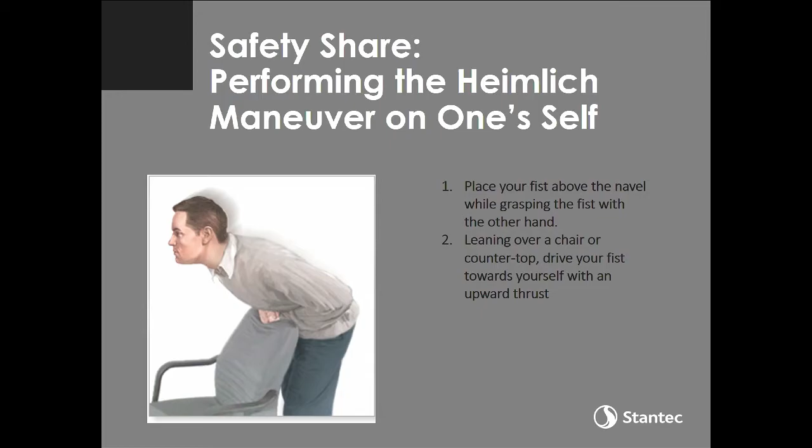This is my co-chair, looking very formal, and I want to thank him because he did a lot to make this session one with a lot of rock stars in it. So I'm kind of excited to get started.

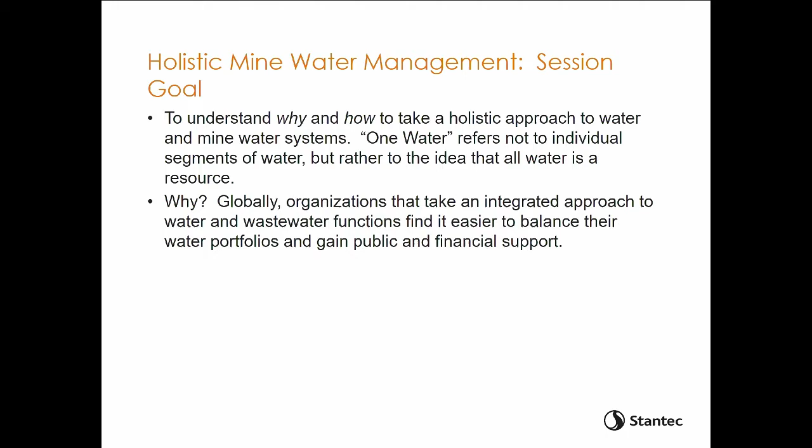The goal of the session is to understand why and how to take a holistic approach to water and mine water systems. And the reason for that is just because globally, organizations understand that this is a competitive advantage if you take this integrated approach. And it helps you gain financial and public support for your projects.

Our next speaker is Marcelo Reginato. He is a water resources senior engineer with Jacobs. He brings 20 years of experience in systems models, watershed modeling, hydrology, hydraulics, and water resources, besides being the technical lead in the development of several water balance models in the mining industry. He has been a key technical resource on many high-profile conservation, groundwater recharge, and restoration projects.

His principal technical expertise is in systems models and water resources. He has an MS in civil engineering from the University of Nevada, Las Vegas, and a BS in civil engineering from Universidade Estadual de Campinas, Brazil.

So let's start with the phases of a mine. What are the typical questions that a manager might have during the different phases of a mine? So we have the development phase, we have the production phase, and the reclamation phase. And during all these phases, the water balance tool can be really helpful.

So I have a couple bullets as examples for each one of the phases, how the water balance model could help you. So for the development phase, you might want to try to understand how reliable your water source is. You're probably going to need some water in your mine, so you want to understand how reliable it is and where the water is coming from to your site. You might need to do some stream diversion. So the model might help you size that diversion that you need at the site. Then you go to the production phase of a mine.

A model could be used there dealing with the production of the mine. You might start with one idea of what your production will be, but then what happens if you change your production schedule? Do you need more water? Where are you going to bring that water from? How much water are you going to import?

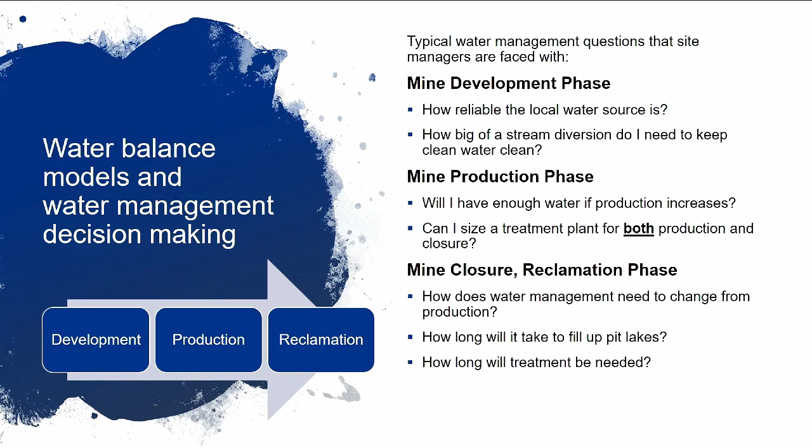Specifically for reclamation, since my case study will be focused on that, I wanted to give a bit more detail. What are the typical activities in a reclamation phase of a mine? First, you want to understand the sources of water contamination at your site. You want to avoid hot spots and keep your clean water clean. You might want to do some stream diversions, rerouting things at your site. You might put in waste rock covers, so you understand the effect of the covers downstream on flows and water quality. You might have passive or active water treatments, so you see how that works with the entire site. And you'll probably have a pit lake where you need to manage the water level. So those are some example activities in reclamation.

The water balance provides a lot of value when you try to evaluate multiple reclamation options. You run the model with what-if cases: what if I have this project, what will be the impacts downstream on flows and water quality? The water balance can also provide insights on the most efficient alternatives, where you're going to get the most bang for your buck, where you want to actually design and implement projects.

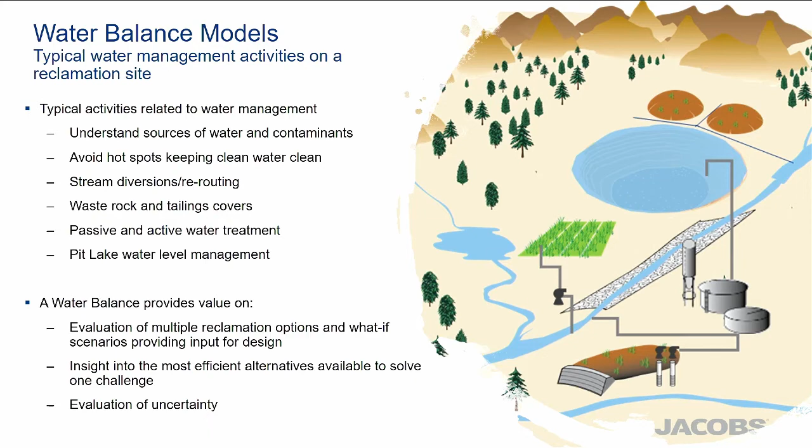And it can also help evaluate the uncertainty that you have at your site. That uncertainty could come from water quality concentrations you might be seeing at your site, or from the uncertainty related to the activities you're planning to implement there.

So a little bit about the water balance components. First you need to define the boundary of what you're going to model. Here we delineate the model domain, what you're going to include. Once you define that, you want to understand the inputs to your model, where the inflows are coming from. In this cartoon example, you might have some in-stream flow here, another stream flow there, some precipitation, maybe some groundwater. You might also have loads coming in, so you want to keep track of the water quality and loads coming into your system.

So you've got the inflows. You also want to understand the outflows from your system. In this case, we have the outflow coming right here. You might also have some groundwater outflow, and of course evaporation. So once you define the boundary and know the inflows and outflows, you need to keep track of the changes in storage within your boundary. That's in a nutshell what we do in water balance tools.

We have different components: a pit lake, waste rock dumps, rerouting of streams, treatment plants. The water balance tool connects all these elements under one umbrella, under one tool, and then you see how one affects the other.

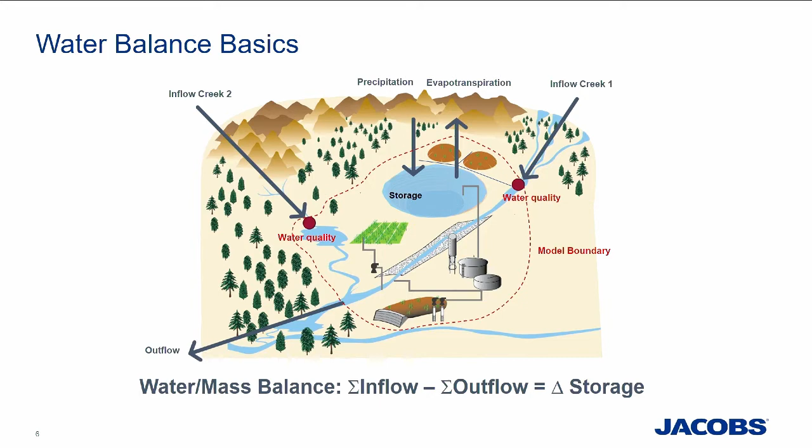So let's talk a little bit about the development, how we develop these water balance tools. Going from the site, we define a conceptual site model, how we think the water moves through the system, and then the model. Our approach generally is top-down, starting from simple assumptions to complex.

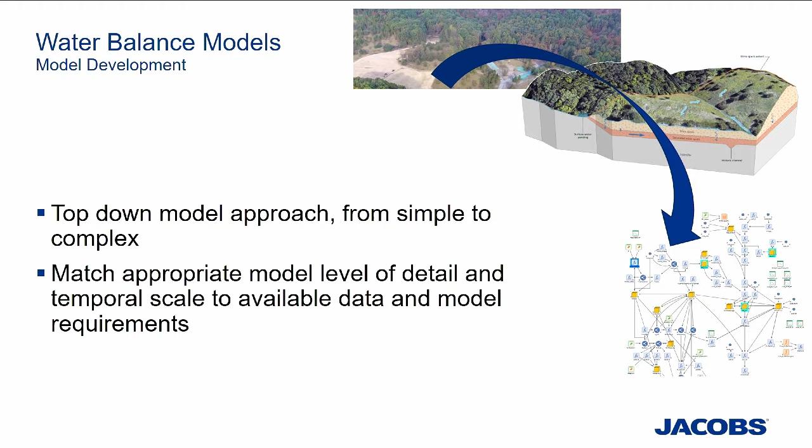That's dependent on the data we have and the questions we want to answer. The challenge in developing these models is to match the appropriate level of detail with the data we have and the model requirements. That's the key thing: look at what information, what data, what you understand about your site, and then build the model that matches that.

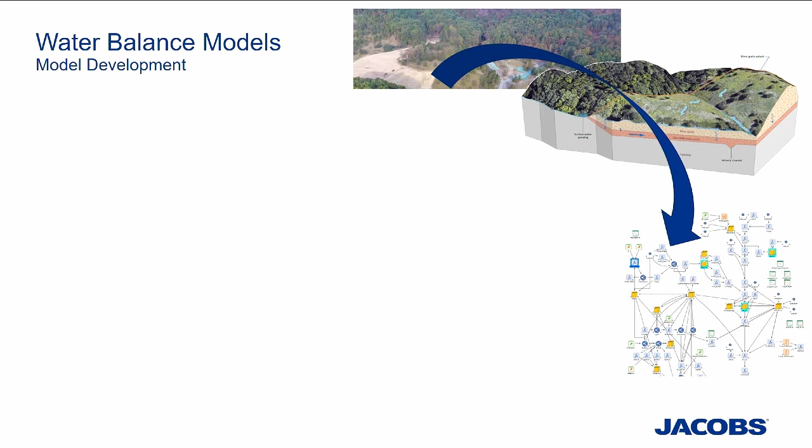There are two main cycles when we develop a model like this. We start with the conceptual model, see what available data is out there, try to fill data gaps, collect more data, and reach a better understanding of the site. We can keep doing this, collecting more data and improving the site understanding.

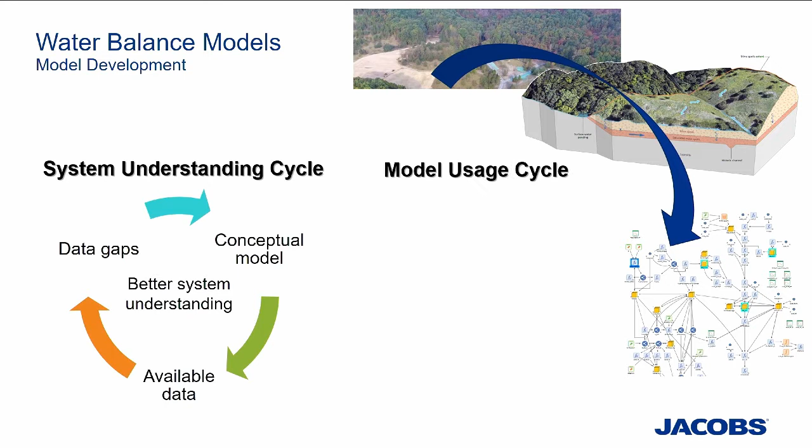Then there's a model usage cycle. Once we're ready with the conceptual model and have an idea how the system works, we can start developing the model, create scenarios, check model results, and hopefully answer the questions. There might be more questions after we run this first cycle, but every time we run it, we improve the model capabilities a little more.

Also, the insights we get from this cycle might improve our conceptual model. And then we might have to request more data, see if we have more data, and run through the cycle again.

So this could be a week's effort—it might be a very simple system where we have the data, we're not going to collect more, so we know exactly what we're going to do, and we develop the model in a week or two weeks. Or it could take many years, depending on how many questions we want to answer and how much data we want to acquire.

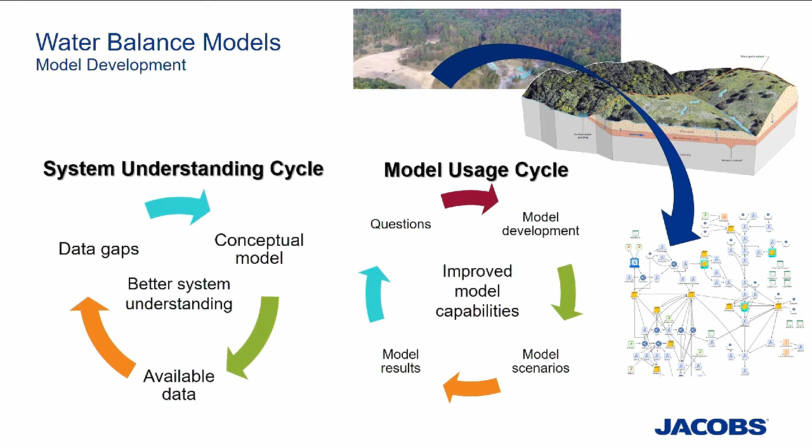So with that, I'm going to start the second part of the presentation, where I'll talk about a case study. This is a historic mine, and operations ceased in 1986. Some reclamation was done back in 2000, but most of the reclamation activities happened after 2014. My case studies will be: one, waste rock cover implementation; second, stream diversion; and third, lake stratification.

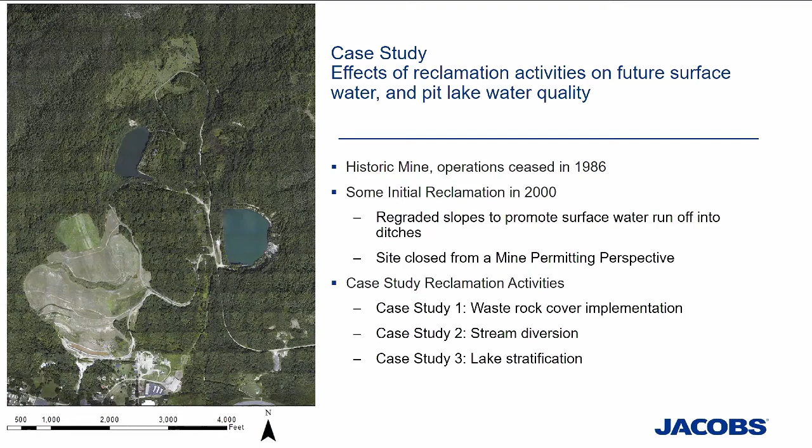Here's the site. The drainage here is from north to south. There are two watersheds, some waste rock piles, and two main pit lakes. A little bit more about the site: here you can see the watersheds in color, green and yellow, the two main watersheds we have, and approximately the drainage with the acreage, just to give you an idea of the size of the project.

We have about 55 inches per year of precipitation at the site, so it's not a dry area—a good amount of rain. The drainage coming from north and from pond 2 goes into pond 1, and out of pond 1 we discharge into the main stream. The flow here is about 850 gallons per minute per year on average for this watershed, and 150 GPM for the smaller watershed. So precipitation is the main input to our model.

When we started developing this tool around 2014, 2015, we had some historical precipitation data—that's what this chart is showing, historical monthly precipitation. But after that, we didn't know how much precipitation we'd get going forward, so that's why you're seeing this chart. Sometimes we might have a very dry month or a very wet month, based on historical precipitation.

We had about 50 years of precipitation records, and we used that in the model trying to understand our uncertainty related to the hydrology. So the first case study will be at that watershed, waste rock covers. The second case study is stream diversion in the north area, and I'm going to talk about stratification in case study 3.

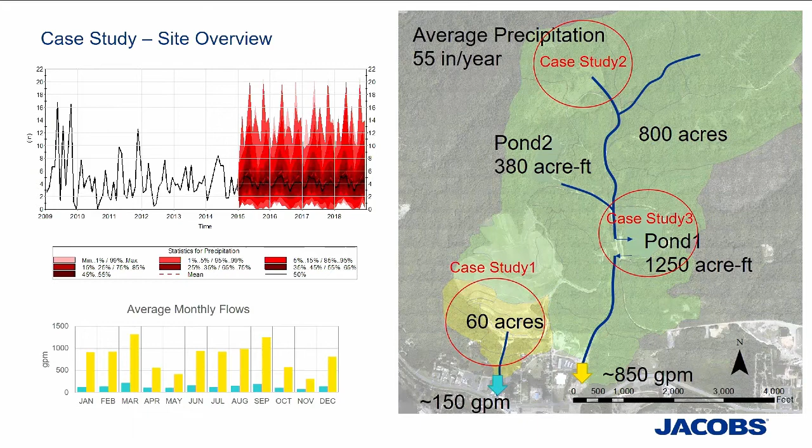So first, waste rock cover implementation. On that area, what's happening here is we have the watersheds. The water infiltrates, hits the contact, the spoils, and we have some flow and water quality downstream here. So the idea was to put covers there to avoid clean water from precipitation reaching the spoils.

And improve the water quality of seepages that were daylighting down here. So with the covers done, we collect the clean runoff, and that will help the dilution with the seepage we're seeing here. So the question for the model was, if we put those covers, what will be the impact on the seepage down here and the water quality? The challenge was to make a model flexible enough to accept inputs so we can change the size of these covers and change assumptions and see what would happen downstream.

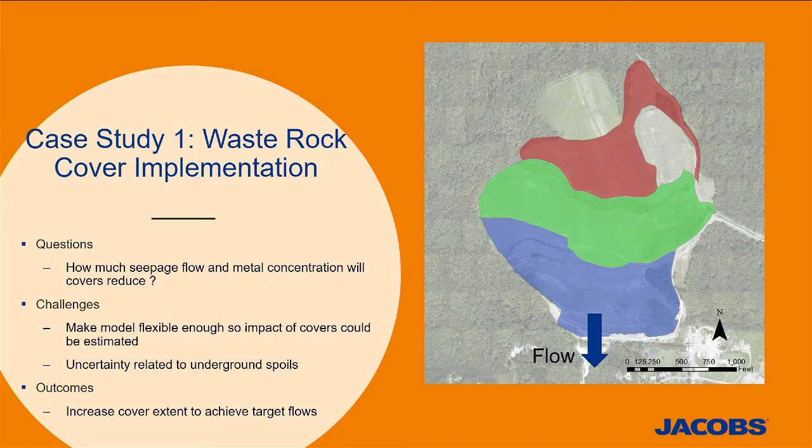The outcomes of the model: we ran a series of scenarios where we changed the size of the covers based on what we're seeing from the model.

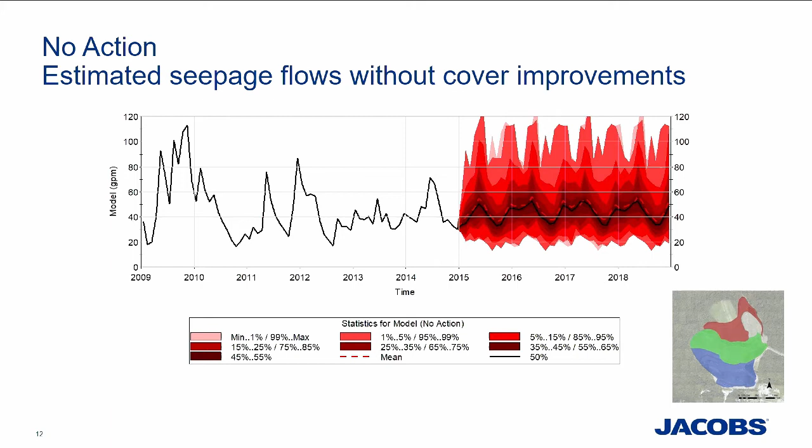So here are some other results. This is the estimated seepage at the bottom of the hill outflow without the cover improvements. This is what we are expecting in flows from the site from 2015 going forward, that's the range of flows depending on precipitation. So we ran this scenario without the covers, and then we put the covers into the model to see the impacts they would have on the flows.

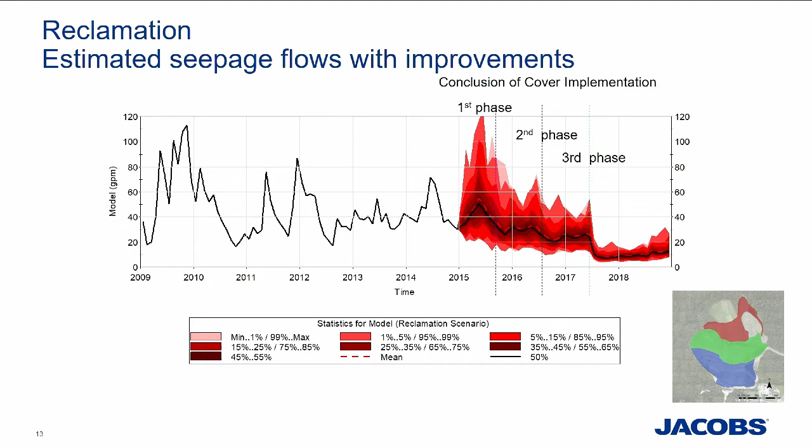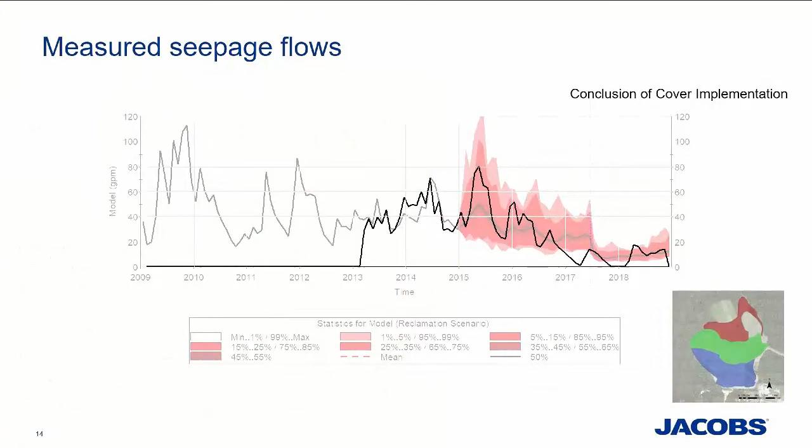So we go to the second case study: stream diversion, up north. The challenge here was we had some waste rock located at this part of the watershed. So this is the watershed, with some waste rock.

We had some clean water from this blue zone going through the waste rocks, and the water quality downstream was poor. So the idea here: if we implement collection, if we divert the stream, put concrete channels here to keep the clean water clean downstream and help dilute some seepage, what would the model tell us? What would be the benefits of doing such a project?

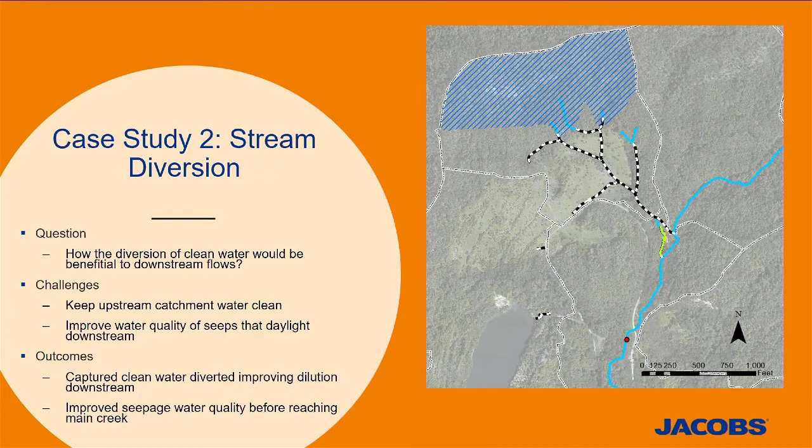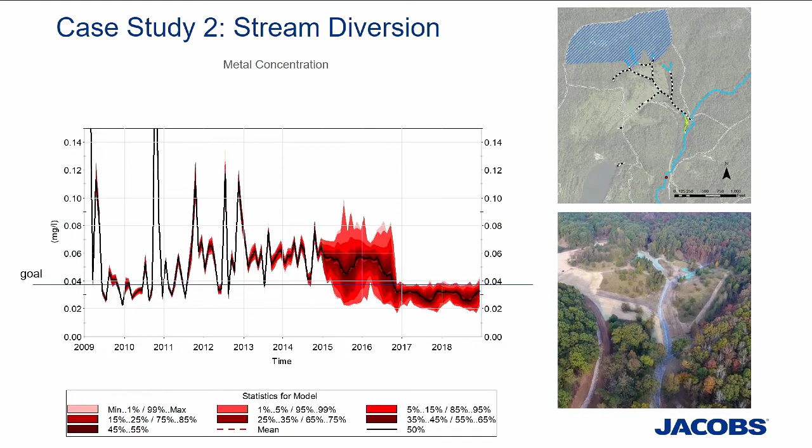So here, similar to the previous case study, but now I'm showing metal concentrations. We had a target goal for concentrations downstream. Here, by the way, are the measured concentrations at the red location. You can see the concentrations for the metal really dropped after the project was concluded. At the conclusion of the project, concentrations dropped from around 0.06 to between 0.02 and 0.04. This was our goal.

Same idea with the precipitation uncertainty, we tried to cover that. The blue dots here are the measured concentrations. I added a moving average line just to help see the difference between the model and the observed data. The gray line here is a no-action scenario, showing what would happen if we didn't have these stream diversions. With the precipitation we saw at the site, we would see higher concentrations.

So then we go to case study 3: lake stratification. The question here was, with all the benefits we did upstream, plus some reclamation activities we had at the watersheds, what will be the water quality discharge from the pit lake?

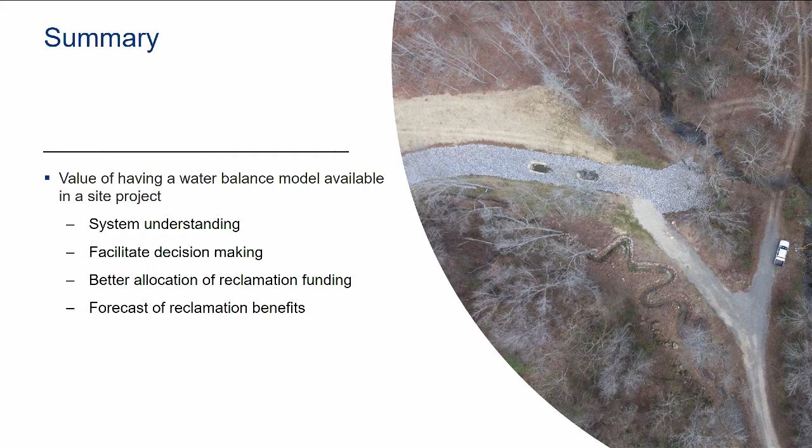That's all I had to present today. With that, I'll see if I have any questions.

We don't have time for questions. Oh, we don't have? Oh.

Do you have one? Is it quick? Can it be quick? Yeah.

No, no. There was a question if we need a groundwater model to do that, right? But we found good correlation with the assumptions we had, so we didn't need that. But oftentimes, you're right, sometimes on the cycles you find that, okay, I need a more detailed model, and then you go and create a more detailed model.

If you had any more questions, I'll be around, so please contact me. Thank you, Marcelo.

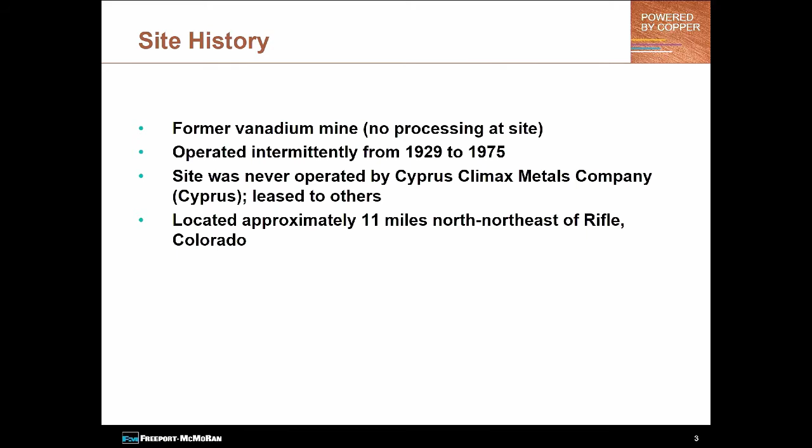Some of the features at the site: there were 6 mine openings, 5 adits, and 1 suspected collapsed shaft. 2 of the adits discharge. You can see the discharge is not very much, 1 gallon and 2.5 gallons. There were 2 waste rock piles, but the main waste rock pile was 17,600 cubic yards, so a very, very small site. And the site had debris all over the place.

The kids had even dragged a couch up into one of the adits. It was pretty interesting, so we could tell that there had been a lot of trespass or recreational use of this site. There was also an unimproved road on the site that the Forest Service actually used a few years ago for fighting a fire.

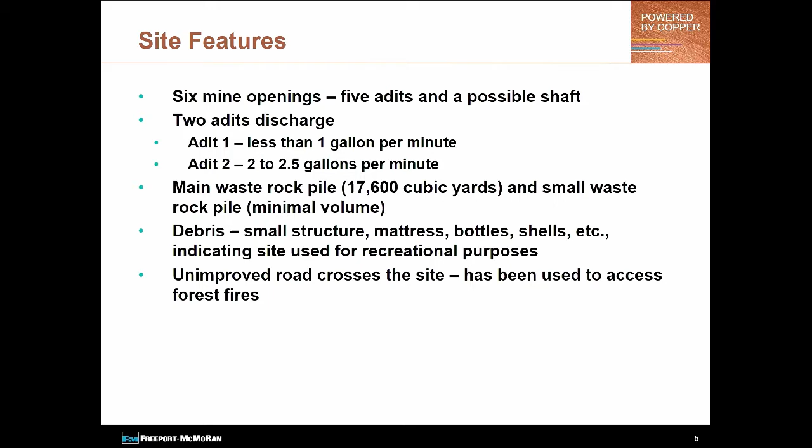We entered this site into the Voluntary Cleanup Program with the state of Colorado. And if you don't know much about the Voluntary Cleanup Program in Colorado, the way it works is you go out and you do your work, and you kind of serve it up on a platter to them, and they either say yay or nay.

But because this site had a radioactive component to it, we also were visiting with the radiation unit, and we got the voluntary program to buy in to take this site along like you would normally take it along and give us approvals of work plans and stuff as we go, so that when we do get to that end point, we've already got the yay. So that's kind of what we did.

So you can see we characterized the site. We closed the openings at the site. We improved the fire access road. We regraded the main stockpile. The other one, from a risk perspective, was there. We didn't have to do anything with it. And not only that, it was very dangerous to try to touch it. It was hanging on the side of a very, very steep slope.

And then we covered that pile with an infiltration barrier and a rock cover. And we chose the rock cover for a couple different reasons. Even though we didn't necessarily need to do it from a risk perspective, rock provides shielding, right, from radiation. So that was one reason. But more so than anything, it's very difficult to get anything to grow in this area. So the rock cover pretty much just makes it blend into the rest of the hillside.

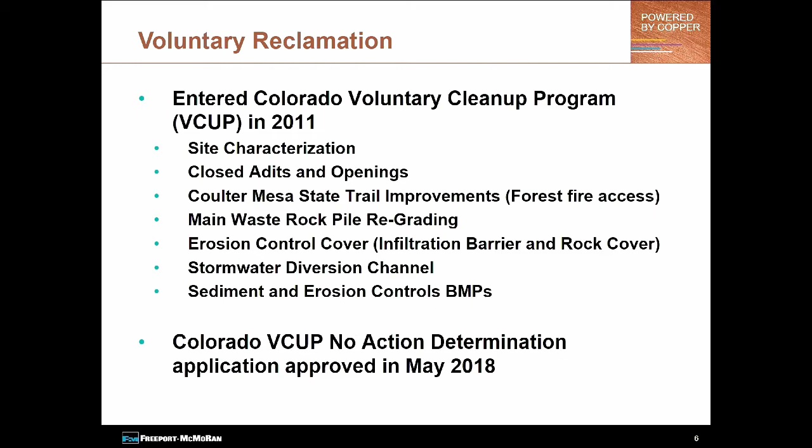We also installed a stormwater diversion system as well. And in May of '18, we got a no action determination from the Voluntary Cleanup Program. However, one thing that the voluntary program does not cover is surface water discharges. And we had those two adits yet to deal with.

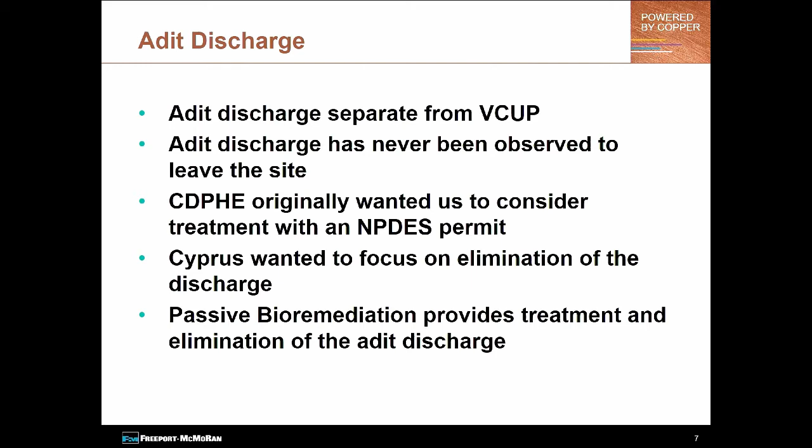Now, they wanted us to look at actually getting a permit. We didn't want to get a permit because we never saw the discharge leave the site. The discharge would infiltrate into the ground not very far away from the adits. So hence the reason why we wanted to look at doing bioremediation at this site to eliminate those discharges and to avoid a long-standing permit.

A couple things that are interesting, not really relevant to this talk, but interesting, is the adit discharge when compared to the groundwater chemistry at this site was different. They're different types of water. And not only that, but the groundwater was an order of magnitude higher in uranium concentration than the adit discharges.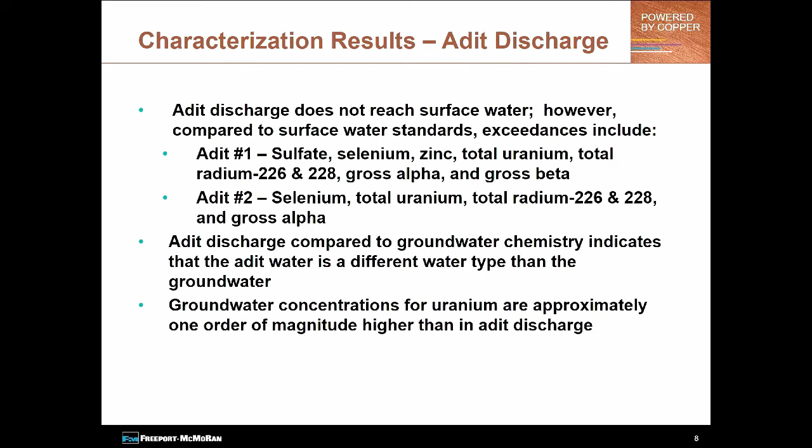But still, when you compare the adit water discharge to surface water standards, you can see that there's numerous standards that we would be exceeding, like selenium, total uranium, gross alpha, gross beta, radium, and so on. So hence the other reason for a bioreactor.

And with that, here you go, Lenny. Close enough. Thank you, Barb. And it's Santi Esteban for anyone who's interested.

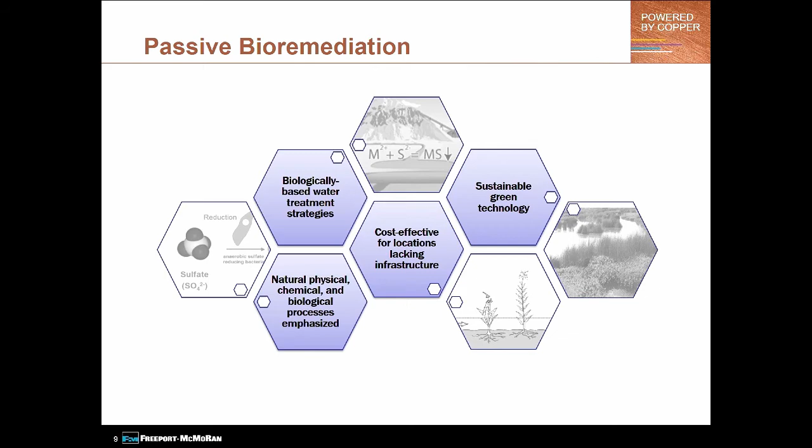Okay, so we were interested in implementing passive biological remediation. And for those of you that are not familiar, it's basically a catch-all phrase for a range of technologies that emphasize biological activity, microbes, plants, etc., that do the lion's share of the remediation work for us. And we found that it was particularly advantageous at a site like this because this is a legacy mine site, remote, and lacking infrastructure, so it offers lots of advantages over other technologies.

We're relying on natural organic substrates and microbes, and therefore they generate relatively less sludge than active water treatment. We've got relatively lower operating and maintenance costs and minimal energy consumption. In fact, the entire system here is operated by gravity flow. There are, of course, limitations. It's not a panacea. We are limited by microbial performance and potential toxicity with high metal loadings. So that all has to be factored in.

There very well is seasonal variation in performance, particularly in cold climates, such as this site in western Colorado. And often you're really confined by space, because these systems, being passive and relatively less efficient than active systems, do require a large footprint.

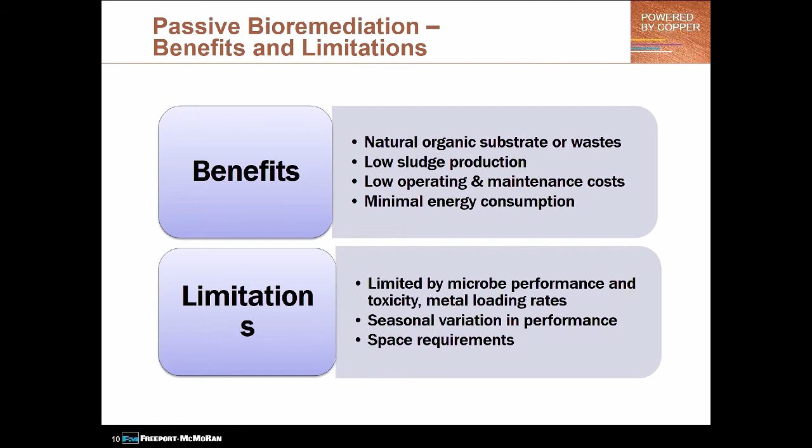Okay, so a little bit of background on the system that we settled on. We decided to use a sulfate-reducing biochemical reactor at the site as one component. Essentially we're focusing on sulfate-reducing bacteria, which are utilizing sulfate. They are reducing that sulfate, producing hydrogen sulfide as a byproduct, and that then combines with cations in the water, forming metal sulfide precipitates. Now, they're also generating alkalinity in the process, which increases the pH of the water.

And in terms of a carbon source that they require for electron donors, we're utilizing locally available organic substrate materials to support those bacteria. And sizing of these systems is based on oxygen, metal, and sulfate loading rates. So those are all factored in. And for this system, we're thinking ideally a hydraulic retention time of 30 hours.

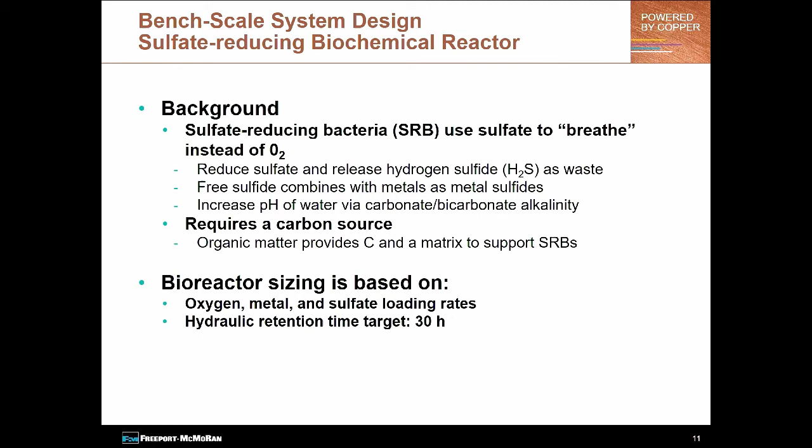So we began working with Golder throughout this whole project, but Golder did some bench scale evaluations with the objectives of showing that we can utilize this technology for bulk removal of those constituents of concern: sulfate, selenium, zinc, uranium, and then some of the radionuclides. And this would then be used to provide a design basis for a full-scale system, particularly factors related to size of the system, flow rates that we'd be able to handle, and hydraulic retention times.

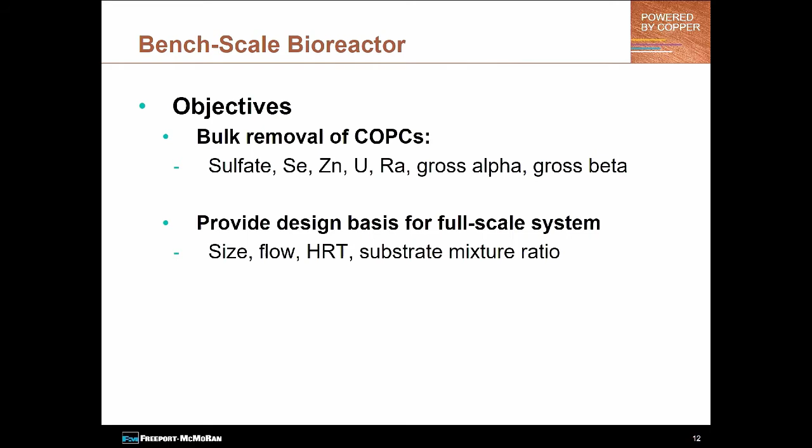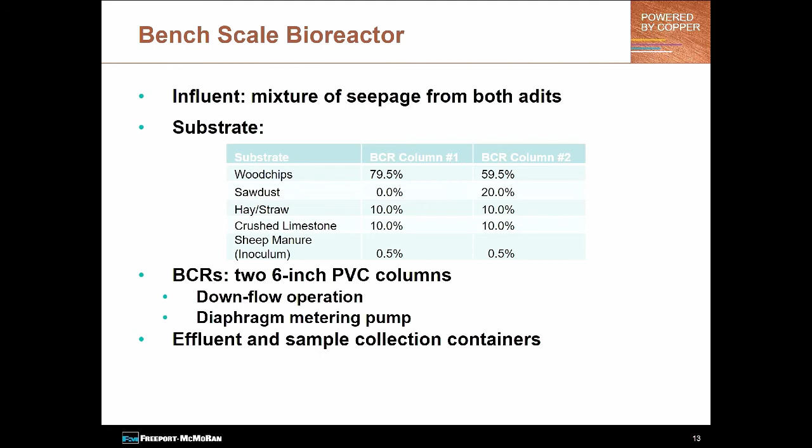So the lab scale evaluation looked at using two biochemical reactor columns and a mixture of adit seepage from both sources, and then two different recipes here, really focusing on changes in wood chips, the relative proportion of wood chips and sawdust as long-term carbon donor sources. And then operated in downflow mode, and they were metered, and then monitored influent and effluent concentrations for several months.

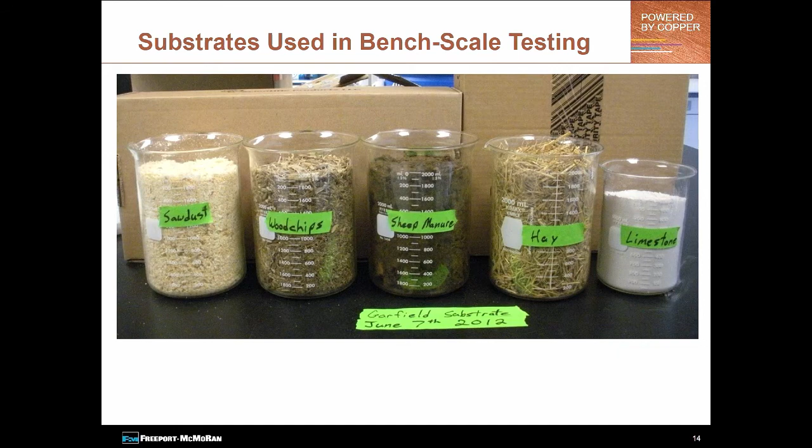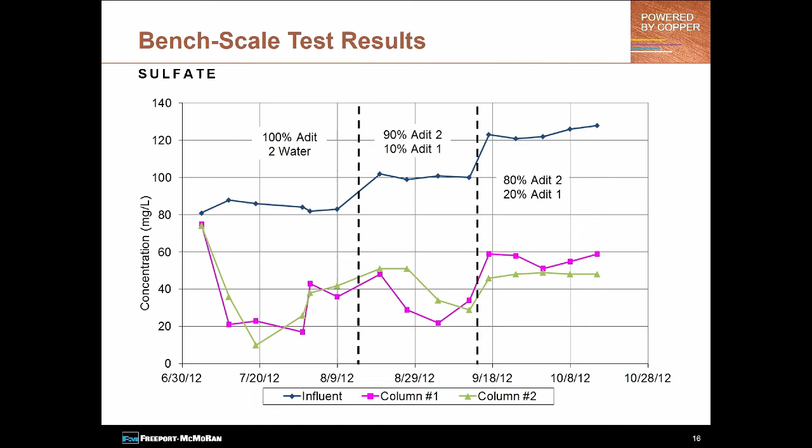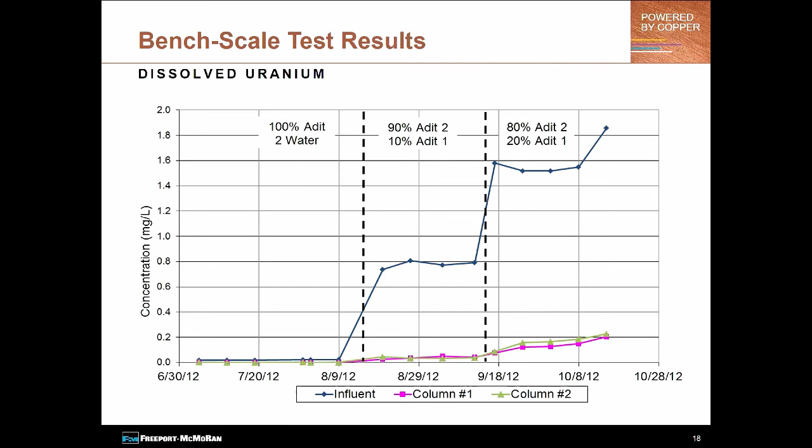Same with selenium, really good results. Uranium, and uranium is reduced in this environment and removed. And then radium, and then alpha and beta. So really happy with the results. Found over 90% removal, upwards of 98 to 99% removal, sometimes 100%, depending on the constituent, down to below method detection limits for several of them. And then looking at sulfate loadings, we estimated that a full-scale system should survive 15 to 25 years.

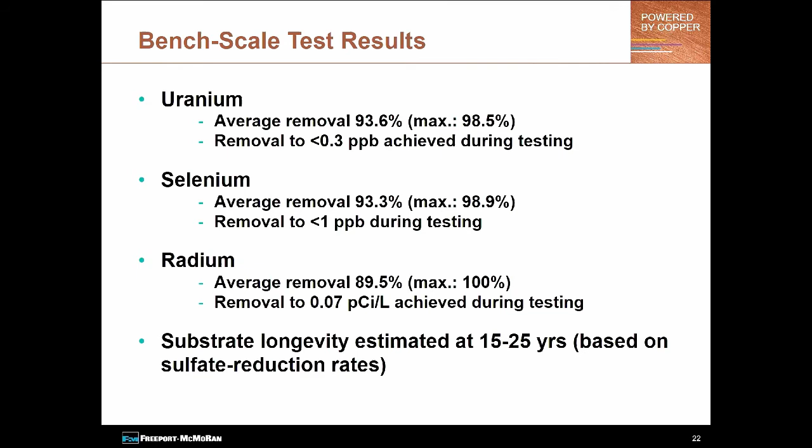Okay, so then using that information, we developed a design basis for a full-scale system. Again, working with the state and the treatment objective of bulk removal of those constituents, same ones we were dealing with in the lab evaluation. We needed to provide year-round treatment of this adit seepage because the adits were constantly flowing at varying rates, but the site being at 6,000 feet elevation does get very cold, so we needed to be sure that we could design the system so that the bacteria were maintained in an environment where they could continue reducing that sulfate year-round.

And we also didn't want to have any issues with any of the pipes freezing during the winter, so we incorporated that into our design. And then lastly, we wanted to ensure that we had non-point discharge of the treated water. And I'll show you how we managed that.

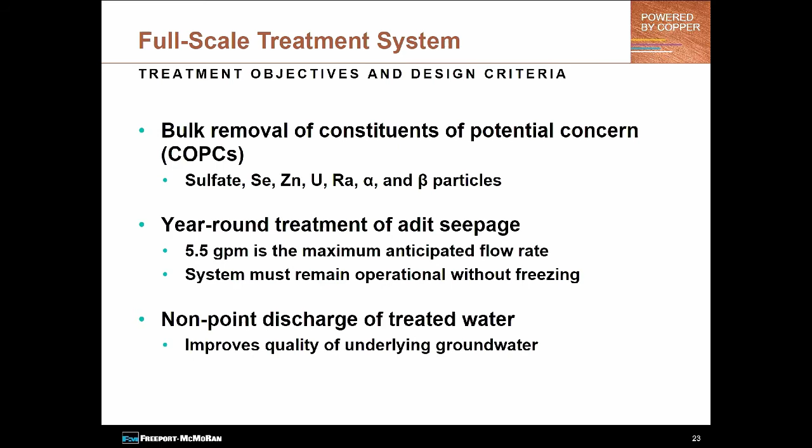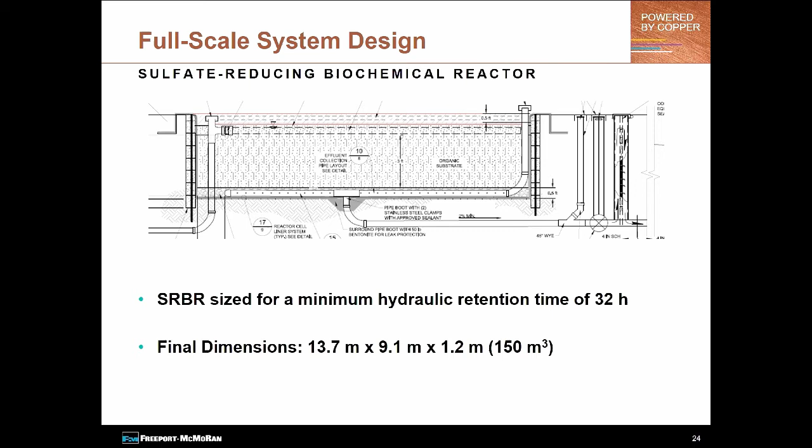Okay, so here's a view of the sulfate-reducing biochemical reactor, the full-size system. We designed this for an HRT of 32 hours. It was downflow, and this is about 4 feet deep of organic substrate. And we had a water level control unit over here downstream, so we could always maintain water levels within that system. And this was roughly 1,350 square feet in size.

Like I mentioned, we use locally available organic substrates: wood chips, limestone sand for that alkalinity, some hay for more readily available electrons for the microbes, and then the original source of the sulfate-reducing bacteria in the sheep manure. We covered it with an insulated cover to help control temperatures throughout the winter. And then we finished construction of this system in the fall, filled it up with adit water, and within 2 weeks, we saw strongly reduced conditions within the bioreactor. So we started operating it throughout that winter.

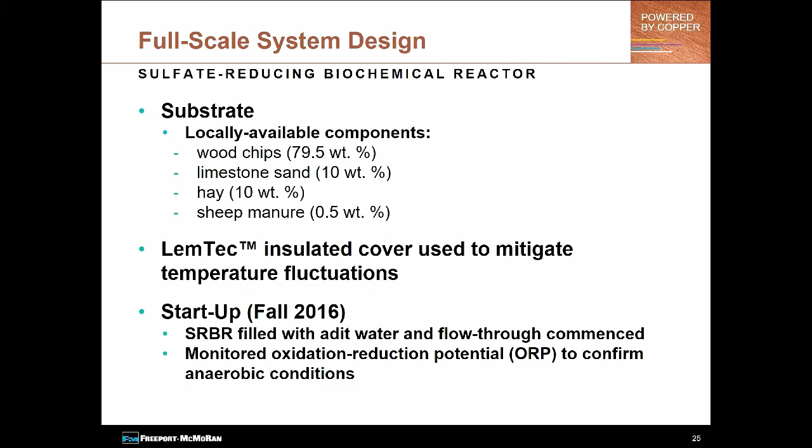Okay, then we added, we didn't evaluate this in the lab, but we added this in the full-scale system, an aerobic polishing cell. In this case, this is a vertical flow wetland. And the way we designed this is that it distributes water across a vegetated sand bed, and this allows the bioreactor effluent to be distributed into the system, and so it's insulated throughout the winter to ensure that the effluent does not freeze. And then that's overlying a gravel layer, and so this is downflow percolation of the treated water.

As it passes through the root zone, this is where the phytotechnology aspect comes in. It passes through the root zone, you've got additional biological treatment as well as physical and chemical processes that are doing some final polishing on that treated water. And this was sized based on the total suspended solids loading rate that we were expecting into the system.

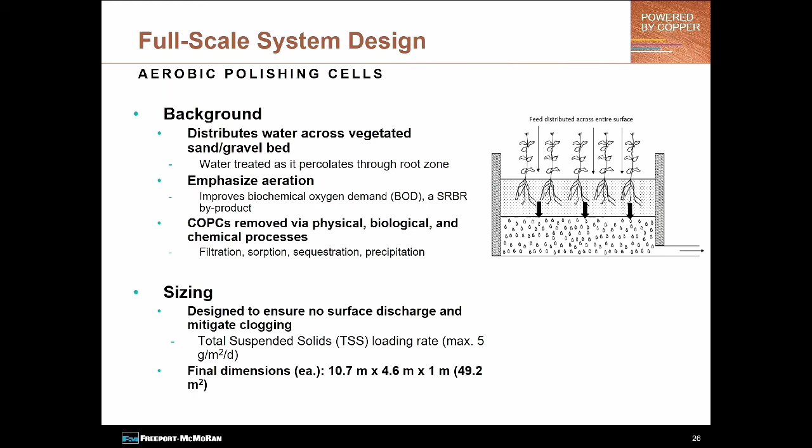We needed about 1,000 square feet of area, and we incorporated this by constructing 2 vertical flow wetlands, and this is what they looked like. So we'll start from the bottom. This was unlined below, and we had a gravel bed, about 6 inches deep of 1.5-inch stone. On top of that, there was a 12-inch layer of 3/8-inch stone. Above that, 12 inches of sand, and then we covered that with 6 inches of mulch for thermal insulation. The bioreactor effluent was distributed in the sand layer to ensure that it wouldn't freeze throughout the winter.

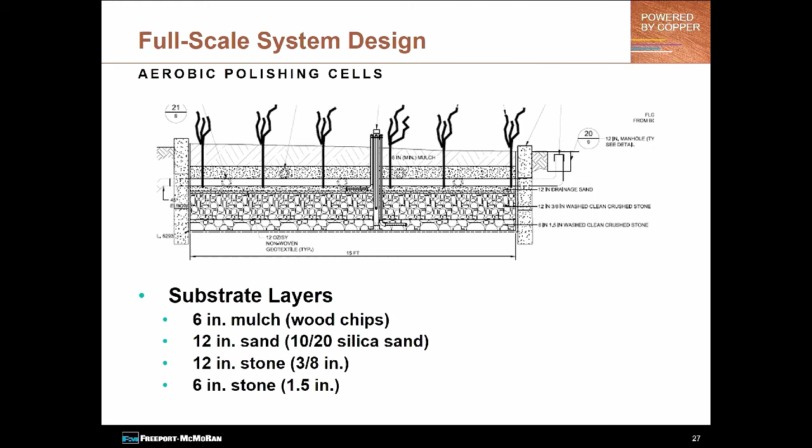We salvaged cattails that were growing outside the adits, so these were already acclimated to that water chemistry. And then we sourced plants from AlpineEco, a local nursery, sourced 4 additional native species that we planted into the system, and we planted a total of 500 plants within these vertical flow wetlands.

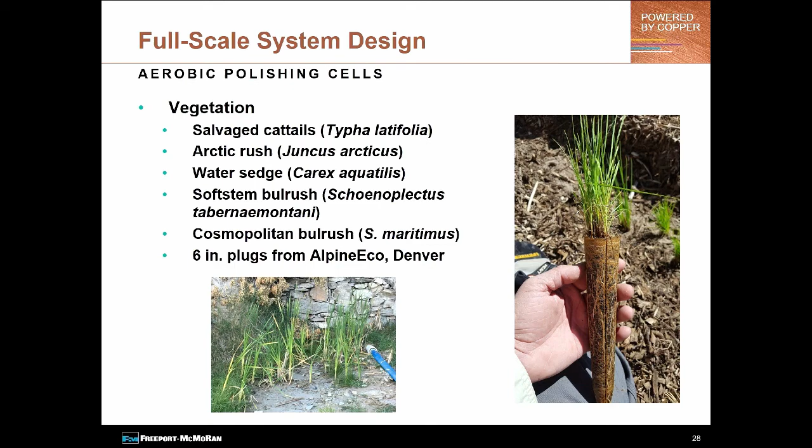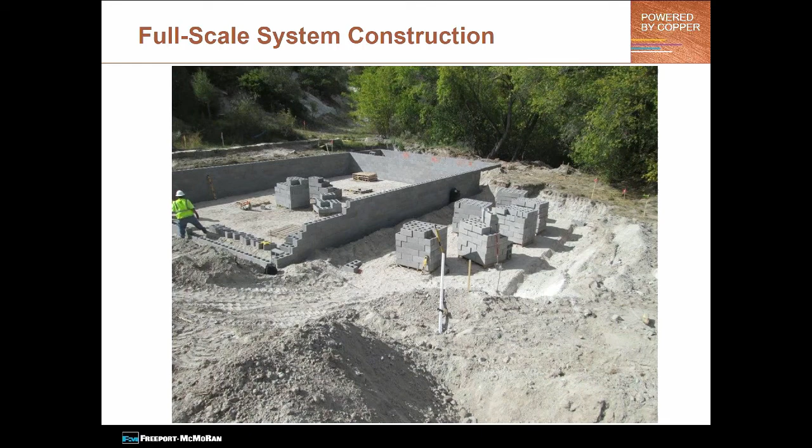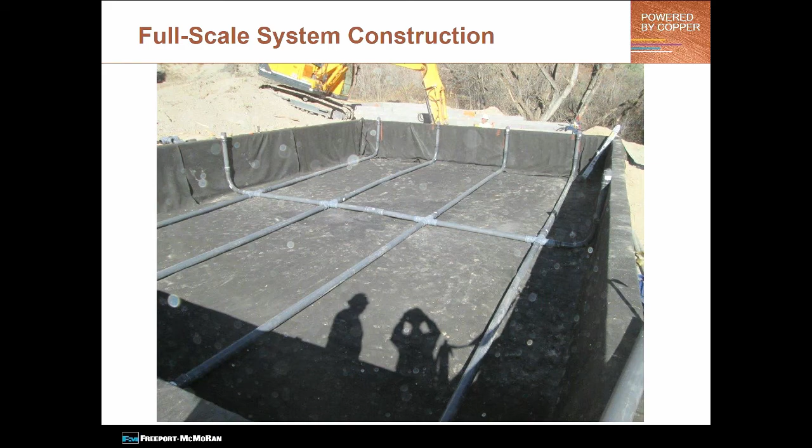Now this is what construction of the site looked like. This is the bioreactor itself. We had a very small footprint to work with, so a very limited area, and things were tight. And so that actually led to a lot of interesting construction activities and managing the construction safely. This is the bioreactor. Here's the lining. Here's the effluent collection system within the bioreactor. Here's the distribution of the gravel layer at the bottom of that bioreactor.

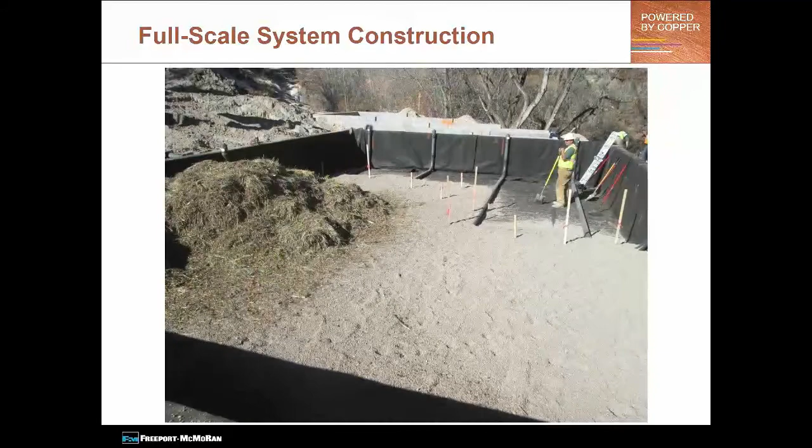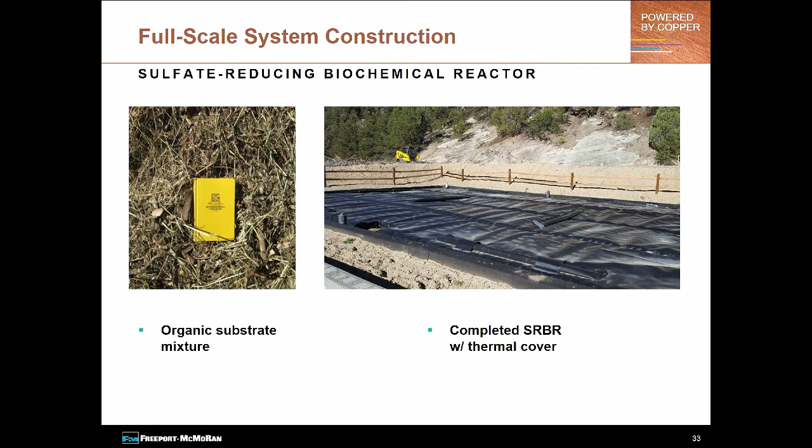And then the organic substrate here. Just to give you a sense for scale and the mixture of that organic substrate. And then this is what the finished product looked like and the thermal cover on top.

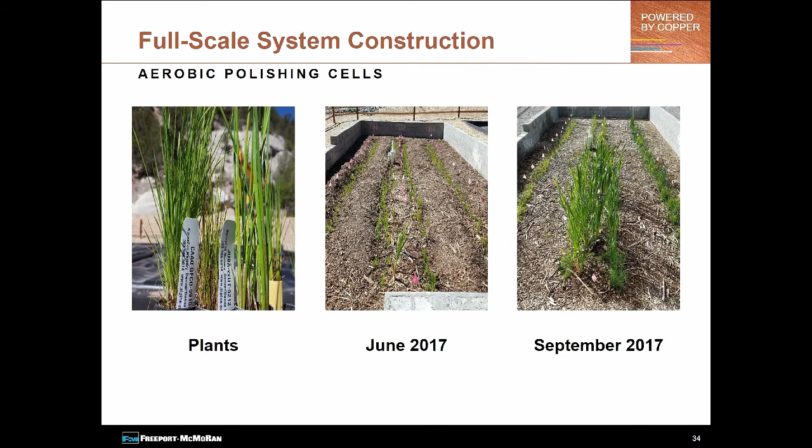The aerobic polishing cells were originally planted in June of 2017. We ran out of time after the bioreactor was constructed in fall of 2016, so we had to wait until the next growing season. And then we provided water to help promote downward root development so that they could then utilize the bioreactor effluent. And within a few months, we had really excellent growth responses.

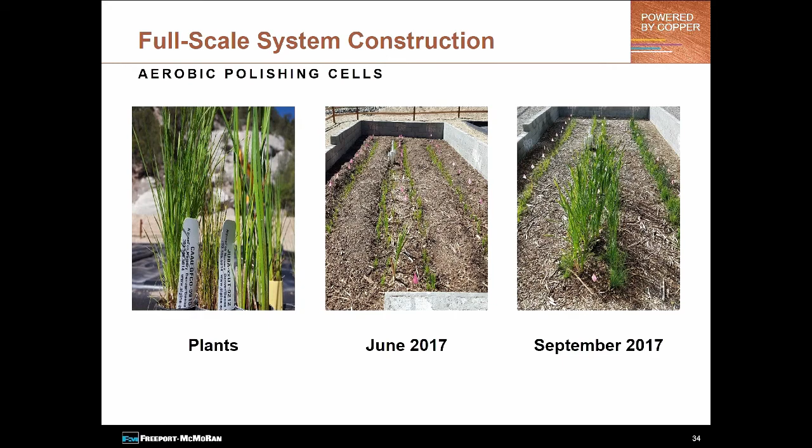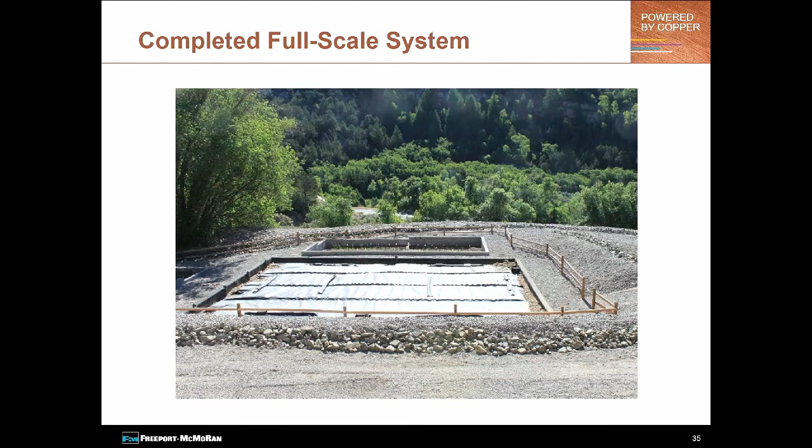This is an overview of the site. After construction, here's the bioreactor. The adits are right around here, and so water was collected from the adits, fed into the bioreactor, treated, and then distributed equally, or as equally as we could, into the 2 APCs on either side. And here's another overview.

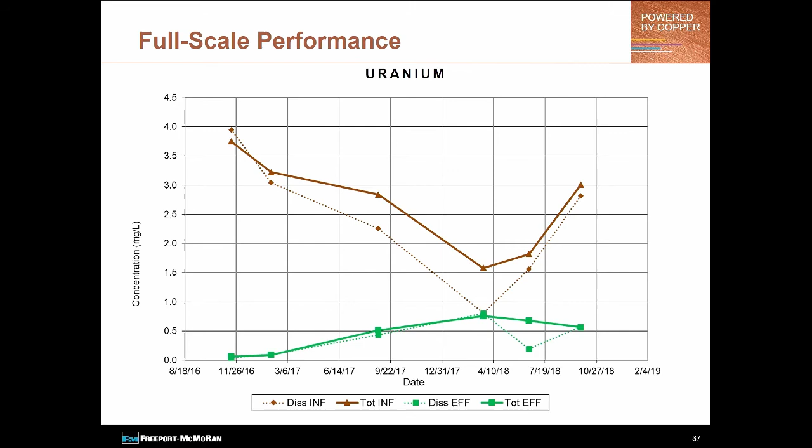Okay, so these are some of the results from the bioreactor. Unfortunately, we are unable to collect samples from the APCs themselves because there isn't enough water being collected in the sampling system that we set up. So we can only rely on bioreactor treatment results. But we are having good removal here in the top line, the reddish brown line. This is the influent concentration for the next several slides, and then the green line is total and dissolved effluent concentrations. So we're finding good uranium removal,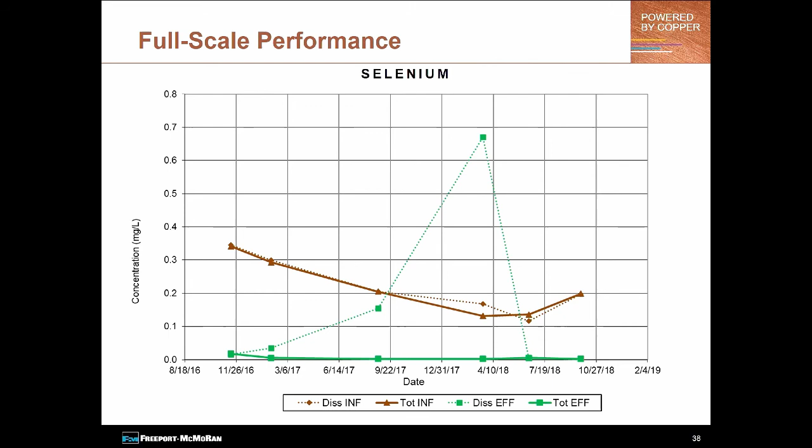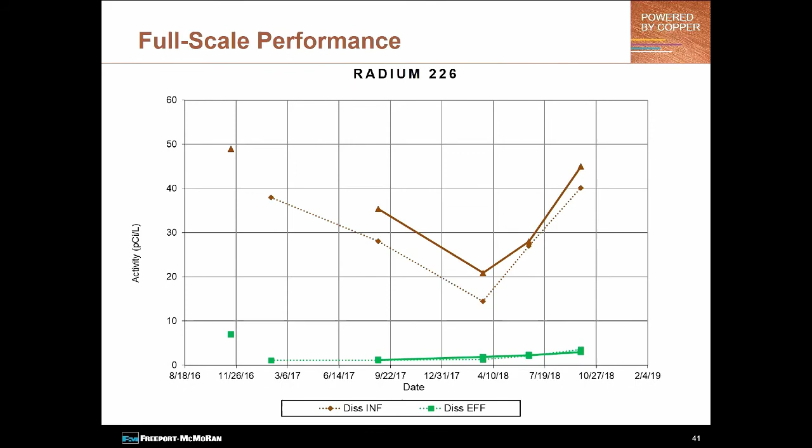good selenium removal. Still trying to figure out what's going on with these analytical results from the lab. Zinc removal as well, and then gross alpha and beta, radium. So these are physical-chemical parameters. Adit seepage, this is far more circumneutral than the waters that we typically work with at some of our sites, so this was sort of a nice change of pace.

But you can see we're having really great change in redox conditions within that bioreactor, which is what's required for sulfate reduction and uranium reduction, and selenium as well. Obviously, dissolved oxygen is being consumed in that system, and then we're generating lots of biochemical oxygen demand because of that biological activity. So as of late, flow rates range between 1 and 2.5 GPM, and ORP, DO, and BOD indicate very strong anaerobic conditions, which is what our intention was.

And we do know that BOD, ORP, and DO will be improved as that bioreactor effluent moves through the vertical flow wetlands, through the APCs. And we've learned that that's been well documented in literature as well as in other treatment systems that we've evaluated in the lab using that technology. And we have been able to show that microbial activity persists through the winter, even though influent water temperatures are less than 5 degrees Celsius. That's well below what sulfate-reducing bacteria typically prefer, but they're doing well under those conditions.

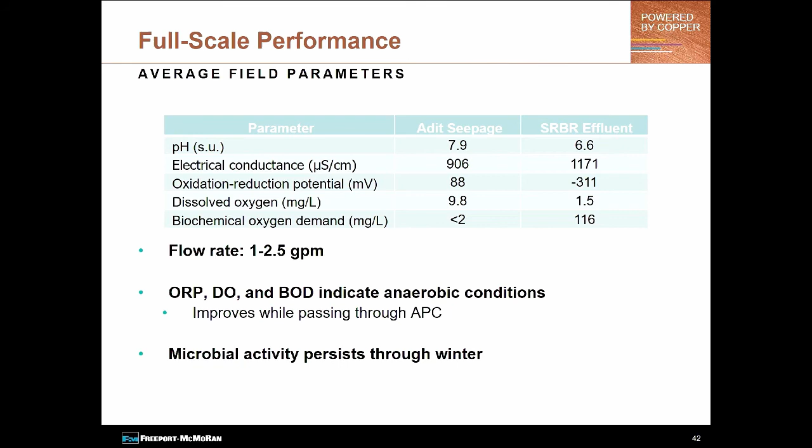These are average removal rates for some of the constituents. We are achieving bulk removal as intended to varying degrees. And this discharged water, after it passes through the entire system, does percolate down through the APC, so we have non-point discharge, but it does further improve the groundwater quality.

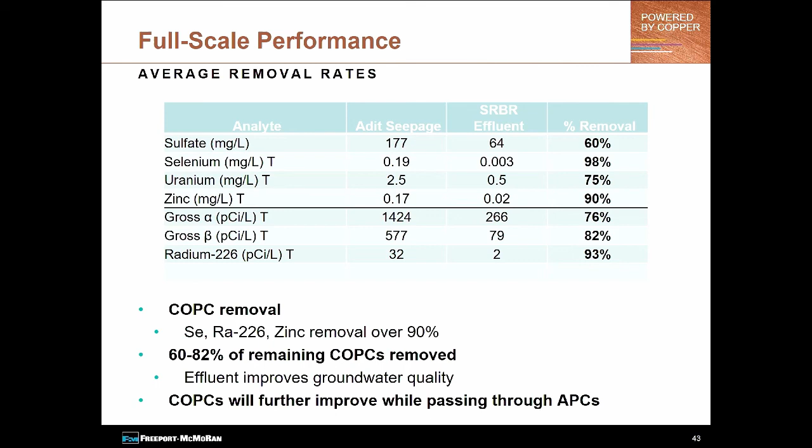So we did run into some operational issues. We tried to implement these inline flow meters, and we just underestimated how much organic was going to be coming out of the bioreactor, so these things clogged up quickly. We tried to implement them to get a better sense and balance flows between the two APCs. So we ran into problems there our first winter, and so we had to come back in during the spring of 2017 and pull them out and add an overflow bypass.

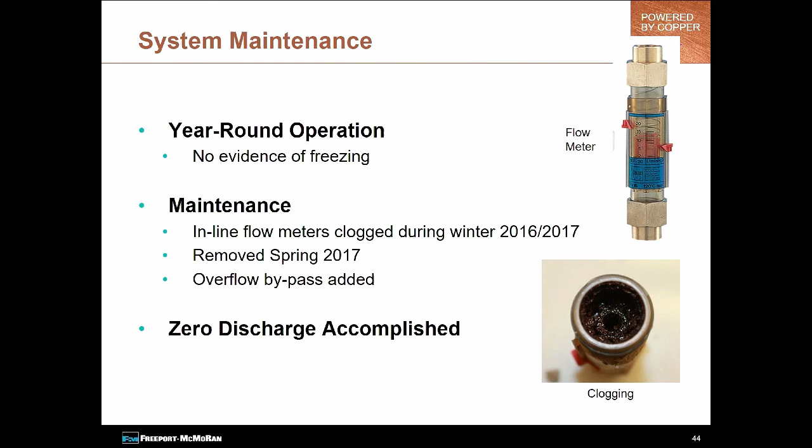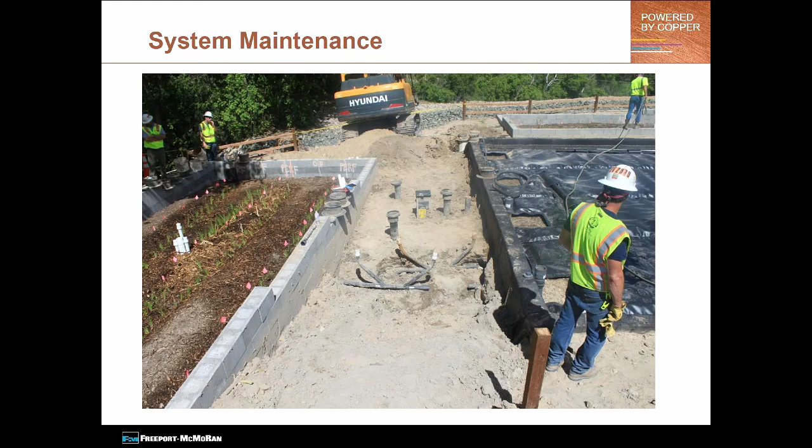But we have achieved zero discharge. And this is just a photo of some of that work that was done to remove the inline flow meters.

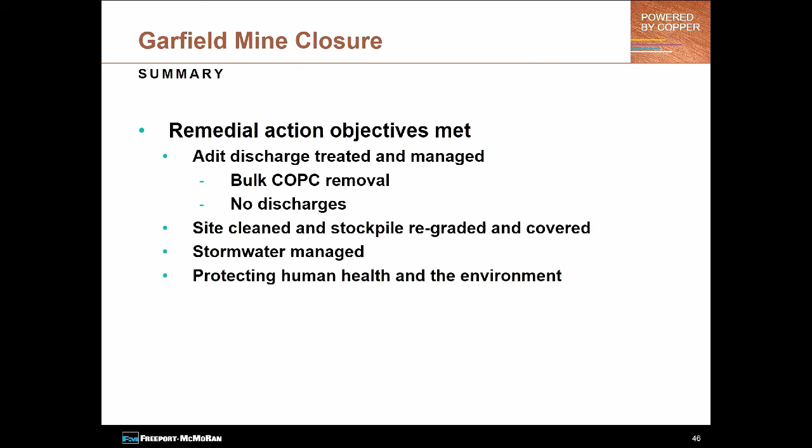So you give it a 15 to 20-year life, something like that. Are there contracts in place to muck that thing out when that's done? It is still our property, so that is something that we would do. We continue to monitor it, and so that's something that would have to be done at some point in time.

Sorry, I missed your no discharges point. I know there's water coming in. Where's the water going? It's percolating down through the APC into the stockpile. I mean, it must go somewhere, right? More water's coming in. Well, the point is, like I stated earlier, the groundwater quality is actually an order of magnitude worse than what's coming out of the adit. So the theory is we're treating what's coming out of the adit because it exceeds surface water standards, but what infiltrates is actually improving the water quality of the groundwater.

But it's true to say you're not storing all the adit water coming into this facility. No, we're not storing. It goes somewhere. The APCs are rock bottom, so it infiltrates. Yeah, there's no surface water discharge. Just wanted to clear that up.

Yes. The material that you're going to have to remove in 15, 20 years or whatever, it's going to contain a lot of uranium and radium. Potentially. What are you going to do with it? Great question. We'll manage it accordingly. It would be thoroughly characterized and then managed as needed. Okay.